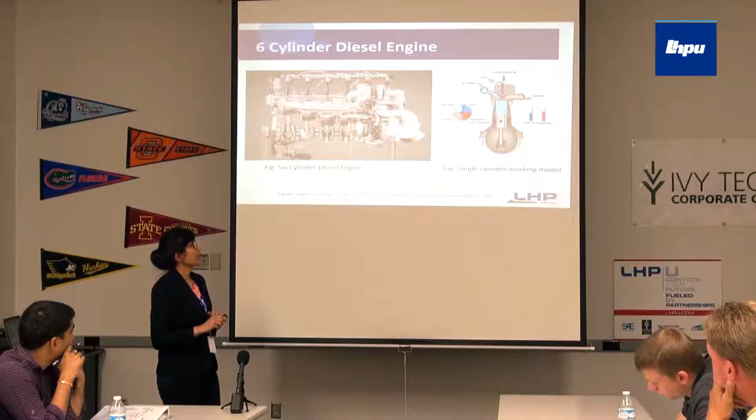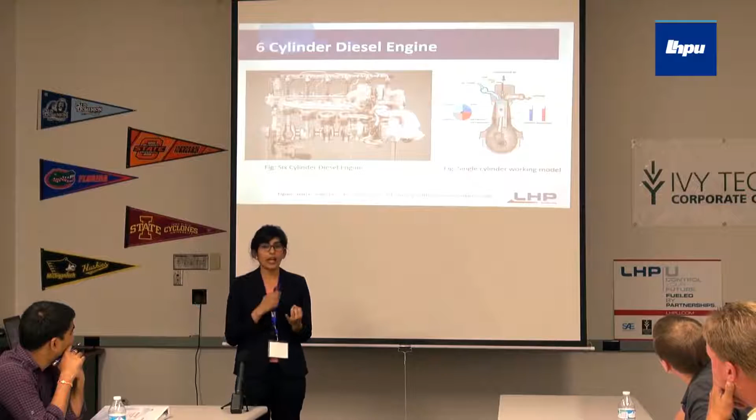As Ochiko said, running or controlling a diesel engine is our goal, that is what we had in mind when we came here. But initially we wanted to know how this diesel engine would work and what things we have to control. Here is a basic model of a 6-cylinder diesel engine, and on the right side is how a single cylinder works. I assume you all know this, but let me give a quick overview: we intake air, compress it, inject fuel at the right time, power is produced which runs the engine, and then there's exhaust. So the things we exactly have to control are when to give the fueling, that is the timing, and the amount of fueling we are supposed to give.

Here we know what we have to do, and here is how we are going to do it. A complete control system model has two parts: one is the plant model, and the other is the controller. From the plant model we sense data using sensors, our controller does all the mathematical calculations we want, and our actuator data is sent to the actuator, which puts the plant model into action. The data we're sensing is engine speed and pedal position from the plant, then we calculate the amount of fuel we have to give to the engine, and the actuator handles the lift pump and the timing of fuel injection, then we call back to the plant with that data so it can do its job.

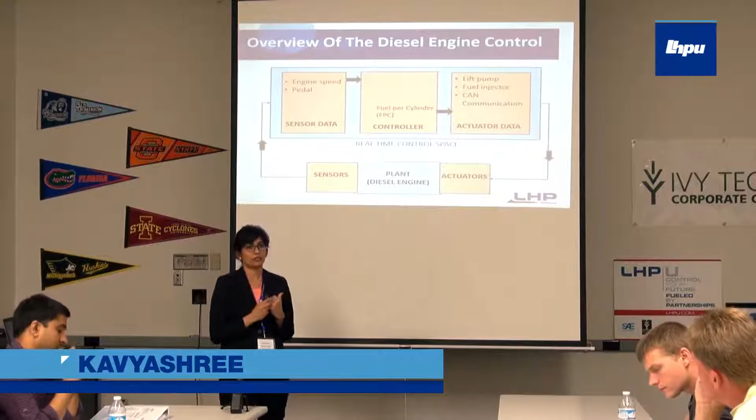But this is not exactly what we started on. We wanted to know how this would work, or have a smaller project that would tell us what we were going to do later. So for that, we designed an electronic throttle controller, which will be explained by Sandeep. Thank you everyone.

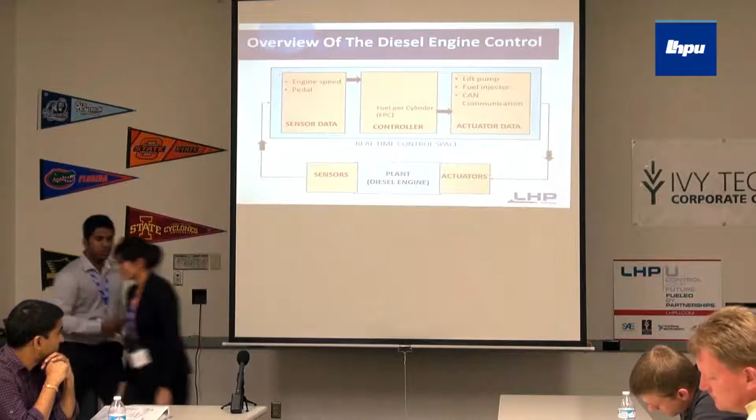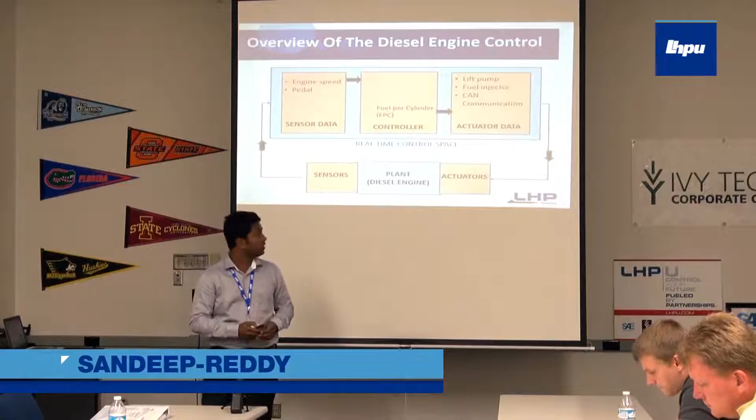Coming to its working, the electronic controller sends a reference signal to the analog slider and the throttle body sensor. When you slide this analog slider, which is connected to a sensor, it measures the position of the slider and alters the signal to the ECM.

The ECM collects the input data and activates the throttle body motor and the sensor of the throttle valve. The throttle valve, connected as a butterfly spindle valve, measures the angle and gives feedback to the controller. The main function of the controller is to take inputs from the analog slider and the throttle body and make sure these two functions accordingly.

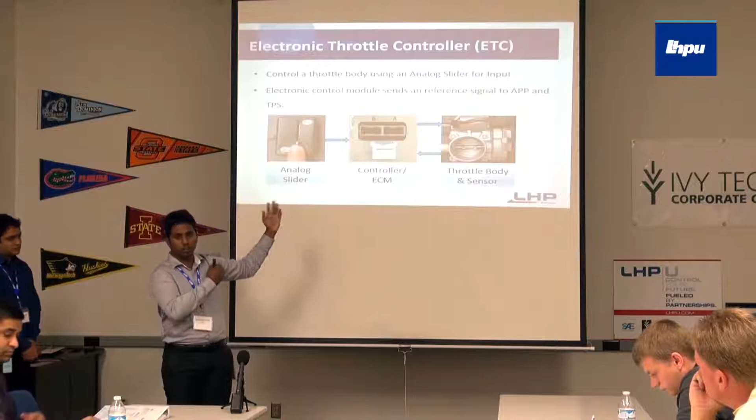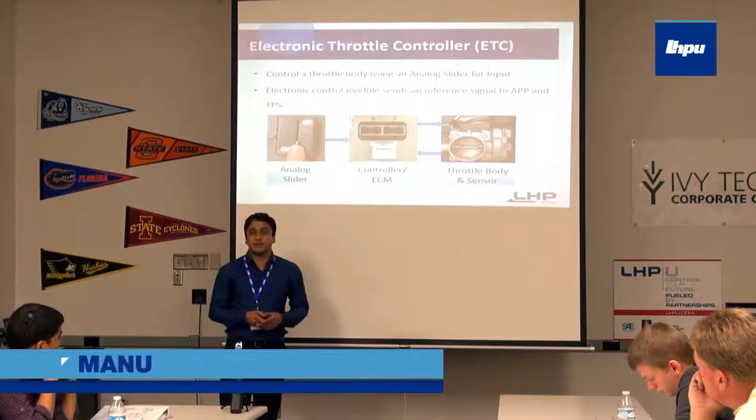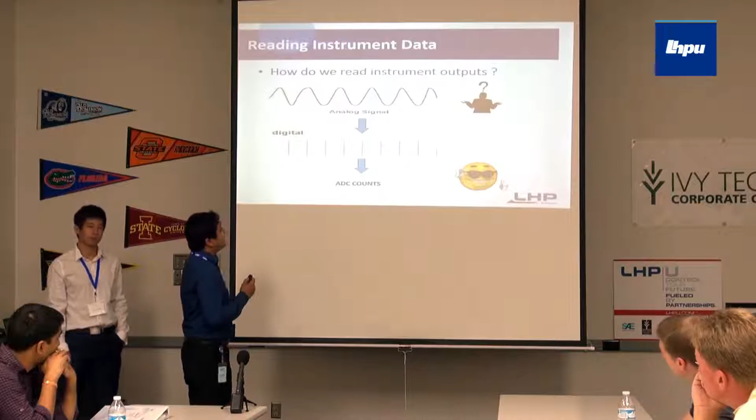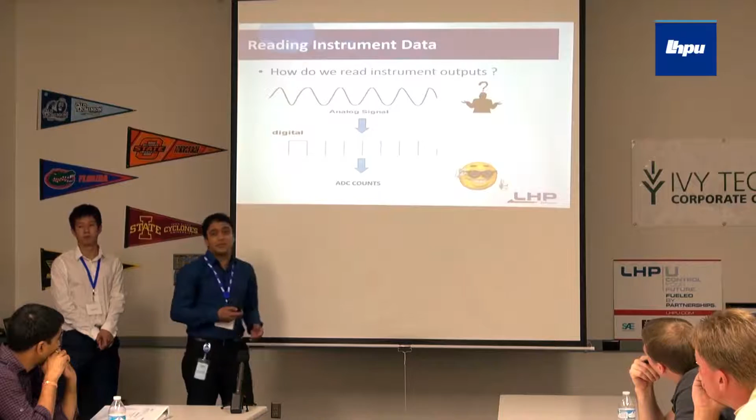What we see here is we need to read some data off of these instruments, and it turns out they operate on analog signals. These wiggles don't necessarily have to mean much, so modern electronics has a way to convert them to digital samples, and thanks to MotoHawk, we can read them in easy ADC counts, mathematical quantities we can work with and convert into engineering units.

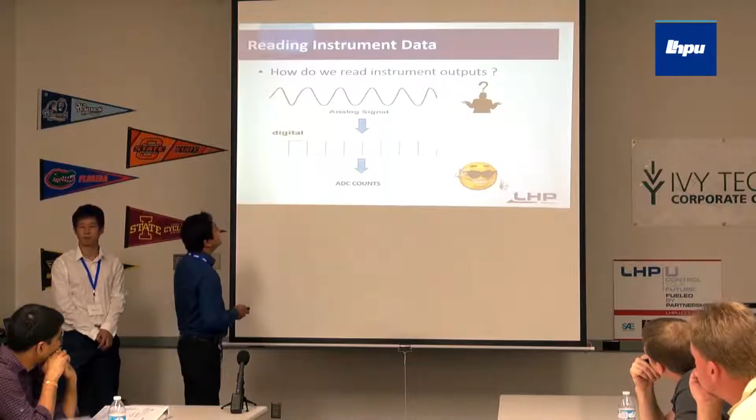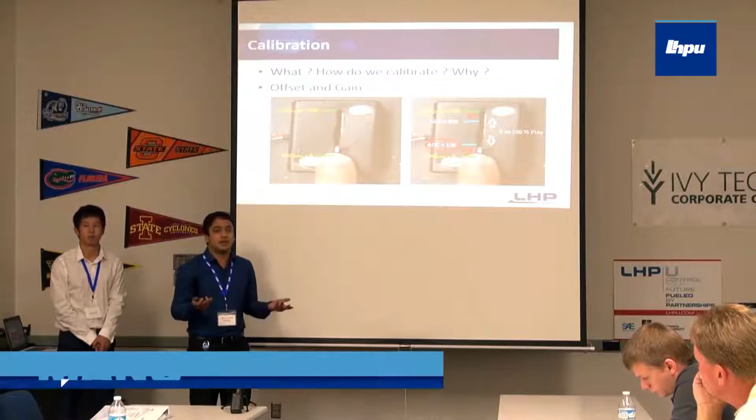We make corrections to our readings, and we make corrections to the inputs that we have. Calibration is really important. This is just a simple case where we are retuning our operational ranges, but sometimes they're far more consequential.

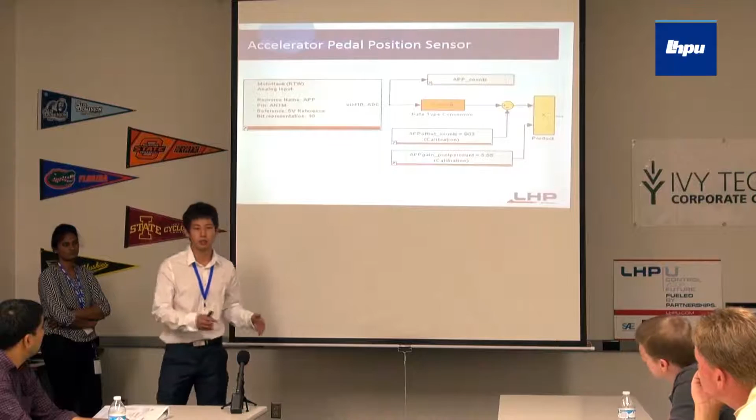I'll introduce how we build the connection between the real sensor and our MotoHawk model. We use this analog model to get the count, and we convert the counts, using gain and offsets, to a scale of 100%. It's better and more convenient for us to further calculate.

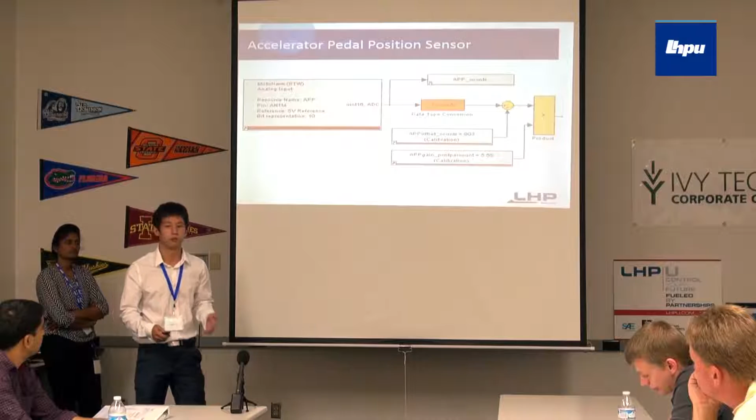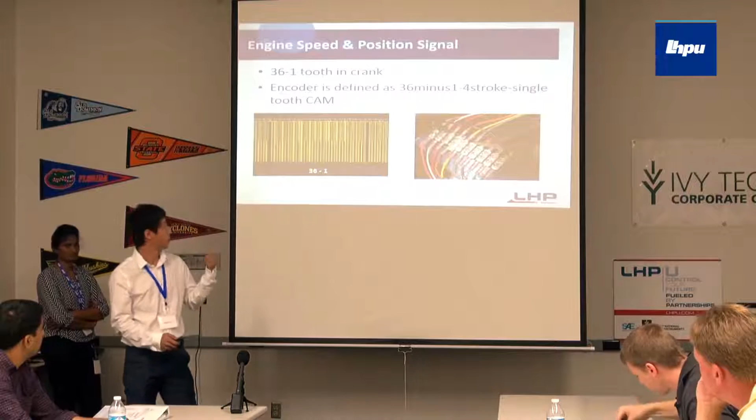And here we go, the RPM sensor. Before definition, we need to figure out how it works, how the encoder pattern works. So we go to the engine room, put the probes to the engine signal, and we get the photo.

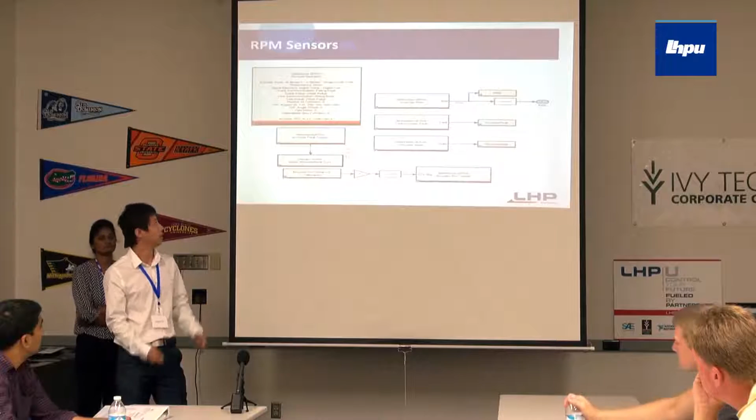We see when there are 35 single pulses, there's a gap - that's to say, there's a 36 minus 1 teeth in the crank. So we know there's an angle in the intervals, and divided by the duration, we can figure out exactly how many rotations per minute. That's where we define it here in this model: the 36 minus 1, the single tooth, and the rising edge - bingo, we got it up here.

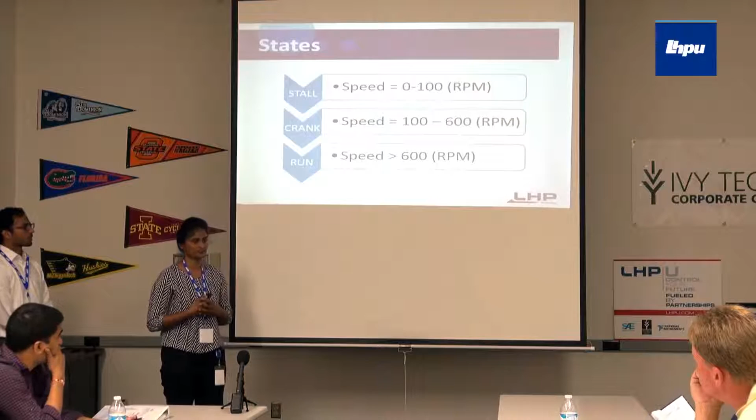In a similar way, when we fuel our engine, it gradually starts giving fuel and gradually speeds up. The initial stage is stall, where the speed is set to be 0 to 100, and the next stage is crank, where the speed is set to be 100 to 600, and the next stage is run. This is the stage where we control the fuel with the speed and the pedal governor.

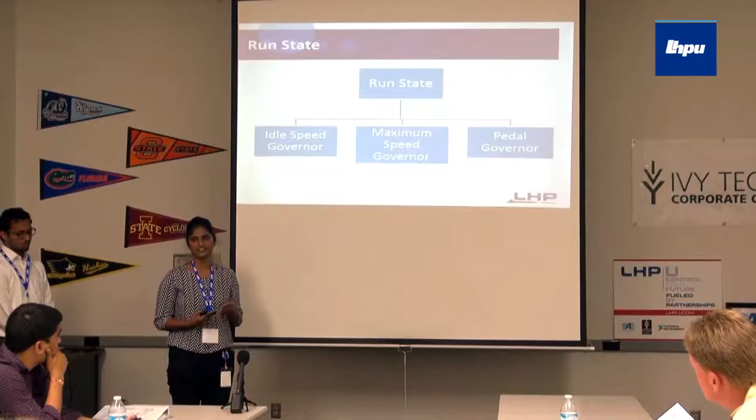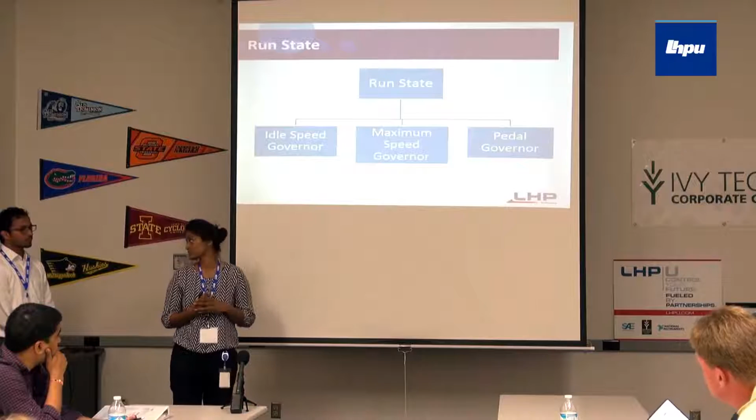If I keep on saying this presentation, you guys get bored and don't even understand what I'm going to say. In a similar way, if we keep fueling our engine, it goes on speeding up, and we don't want to blow up our engine again. So now we're limiting the speeds using max governor, idle governor, and pedal governor, and this is being explained by Suyog. Thank you, Kirti.

Hi, my name is Suyog. I am a graduate student in electrical and computer engineering at Purdue School of Engineering at Indianapolis. I am going to talk about the controller part. As explained by Kirti, there are three governors: idle speed governor, high speed governor, and pedal governor.

So how does a controller decide which governor to be activated? If your RPM is below 1900 and you are not giving any throttle input, which can also be below 2%, then your idle speed governor will be activated. Otherwise, it will go on to the high speed governor.

For the idle speed governor, we have set a limit of 700 for idle speed, and we are targeting our speed to 700, with the throttle percentage less than 2%, and we are achieving a smooth curve while accelerating and decelerating.

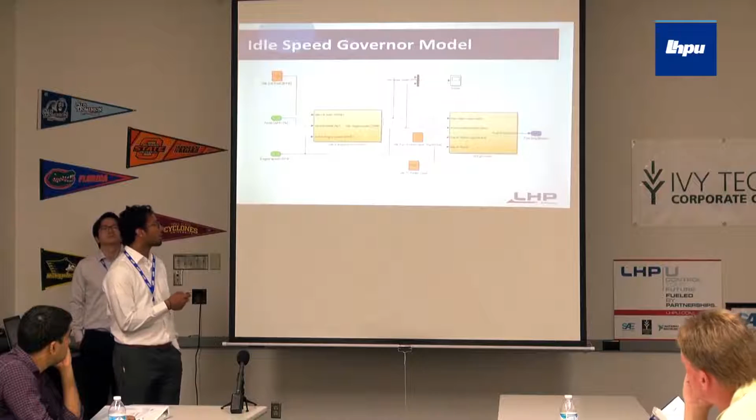Here's our Simulink model. You can see the idle management controller. Here are some logic and mathematical equations in it. This is a PI controller which just increments or decrements according to the orders from the idle management controller. It acts as a brain, and this acts as a body part.

The pedal governor is just relating APP with the fuel. If we are not using the high speed governor or the idle speed governor, the pedal governor will be activated.

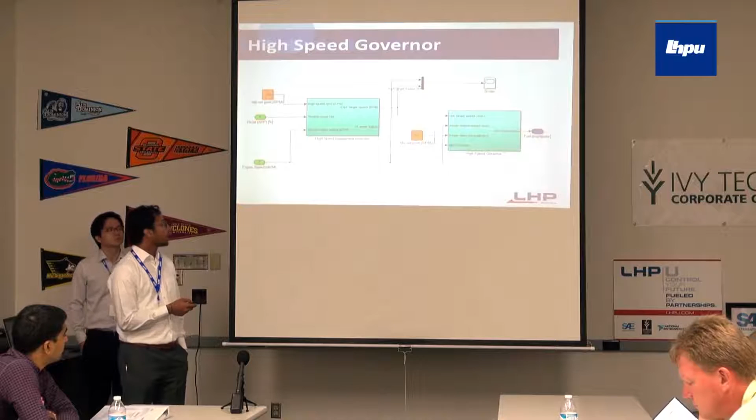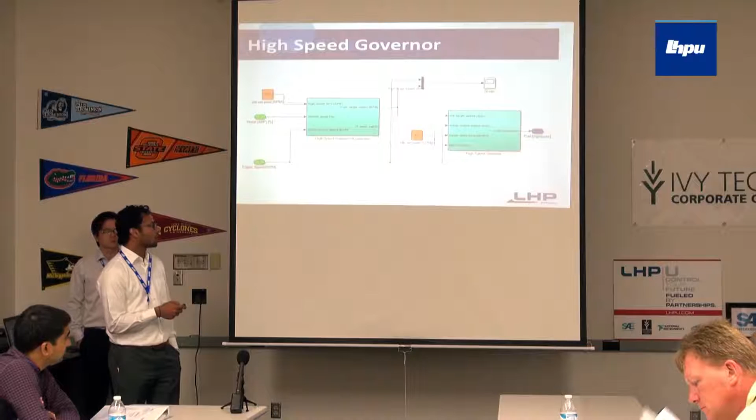This is the high speed governor, which is identical to the idle speed governor, but the mathematical calculations and logics here are different. In this case, the RPM should be greater than 1600, and your APP should be greater than 2%. We have PI control to increase or decrease the speed and set it to 1700 RPM.

Thank you. My name is Yinchuan, and I graduated from University of Illinois at Chicago with my master's degree in electrical computer engineering. I'm going to talk about the PI controller.

What's a PI controller? It's a control loop feedback mechanism trying to decrease the difference between the target speed and actual speed by adjusting the fuel injection. What does that mean? Basically, it's like you're chasing girls, and according to the girl's reaction, you adjust your next move.

So how does it work? The PI controller continually calculates the error value. The error value is multiplied by the P gain to generate the P part, and the error goes through an integral transfer function to generate the I part. By adding them together, you will know how much fuel you need.

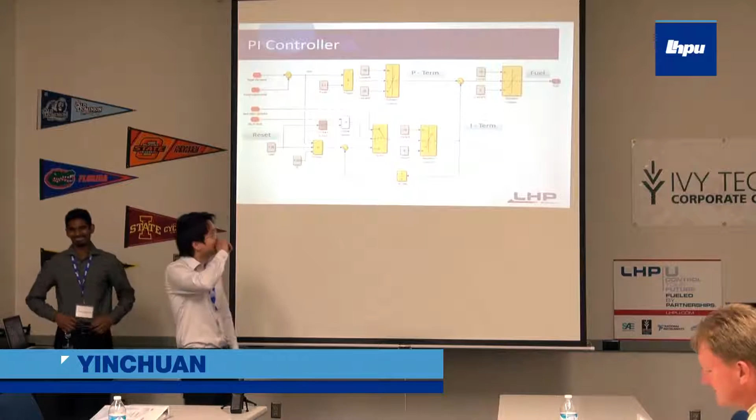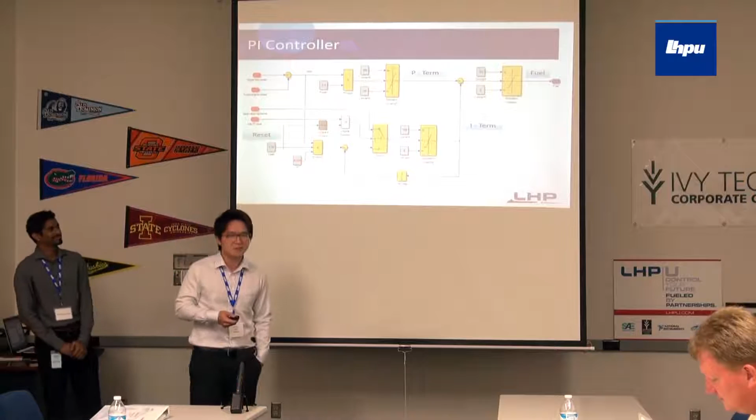But how to transfer this fuel from the tank to the engine, I'll let my teammate Shanmuga explain this for you. Thank you, Michael.

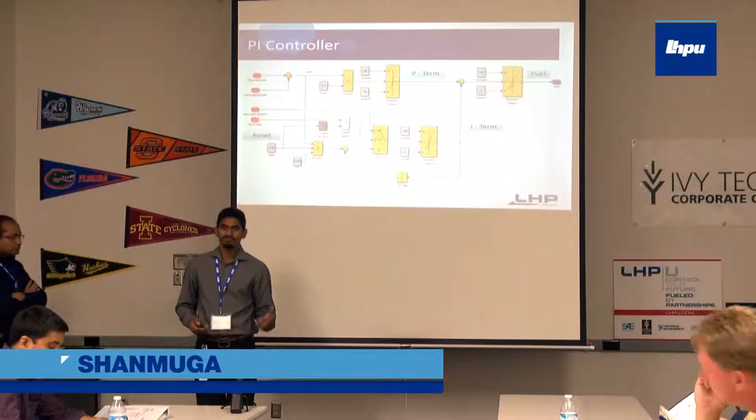Up to now, we have seen the specifications of the engine we are working on, the sensors, and the controller output, which is the fuel, the calculated amount of fuel which is going to be given to the actuators.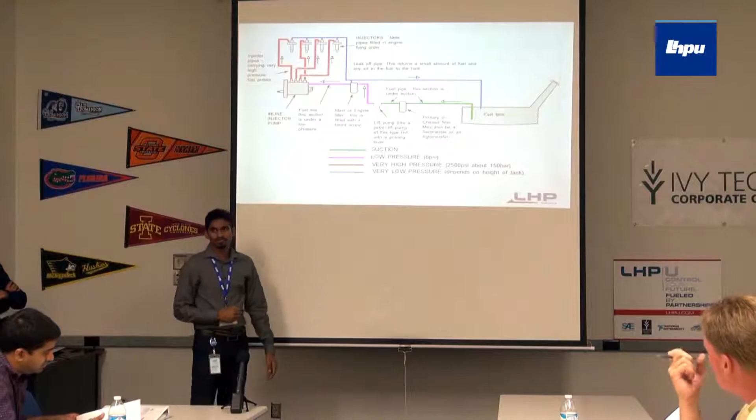And this is our lift pump. I have to say something about this - this is the guy who created a lot of trouble for us and faced a lot of trouble from our faulty models. And this is the overview of the fuel management system.

In motorcycles, we have the fuel tank on top of the engine, where we can use gravity to take the fuel from the tank into the engine. But in case of cars and trucks, it's not going to happen - we cannot use gravity anymore. So we need something else.

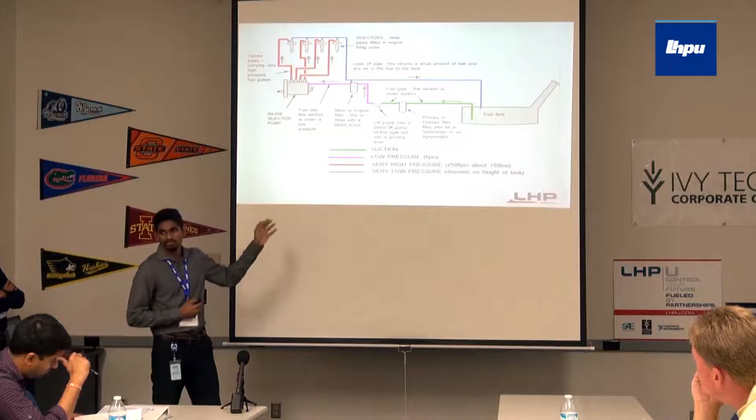Here comes the lift pump into action, where it takes the fuel from the fuel tank and passes it through the chassis filter and gives it to the VP44. But it also does a main function in keeping the low pressure among the system up to the VP44.

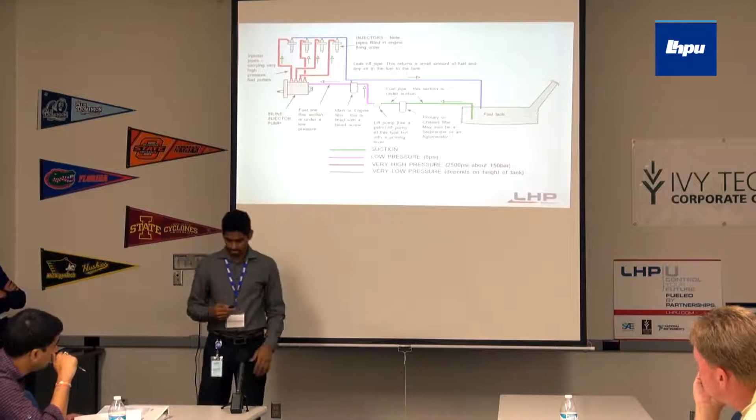And this is our governor model, where we have initially found out the states where the engine is running, whether it is in stall state, crank, or run.

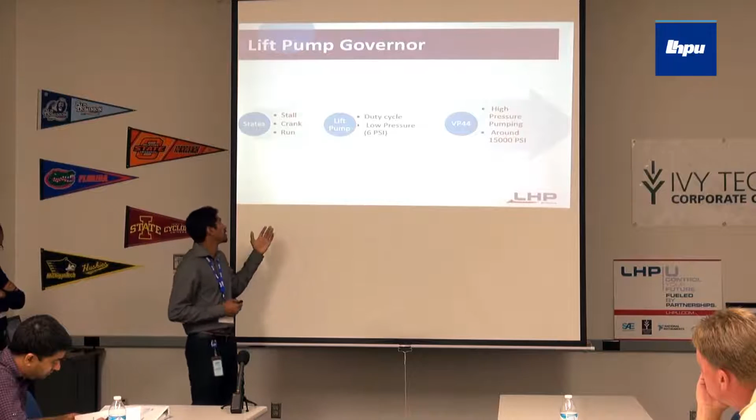If it is in stall state, we have given the duty cycle as 100% for the first 2 seconds, just to prime the pump, to bleed the air bubbles outside and send clean fuel.

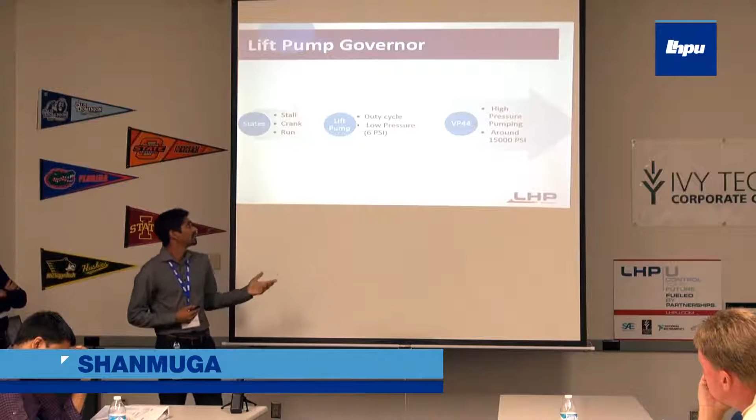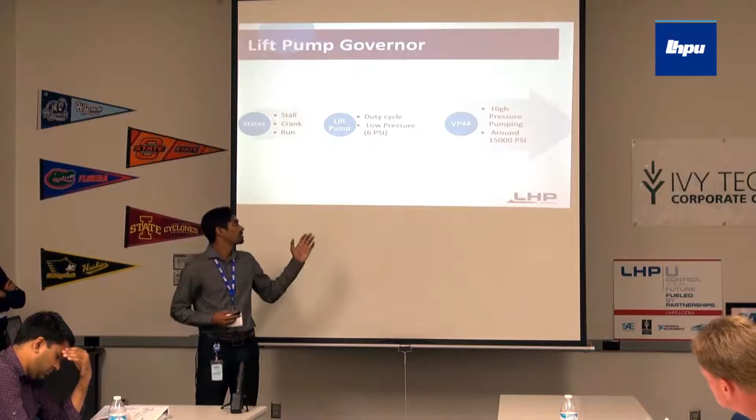And for the crank state, we give 50% duty cycle, and for run we maintain 100% duty cycle, and we maintain the low pressure at 6 psi. And the rest of the things will be managed by the VP44 to pump the fuel with high pressure.

And that will be clearly explained by my teammate Tanvir.

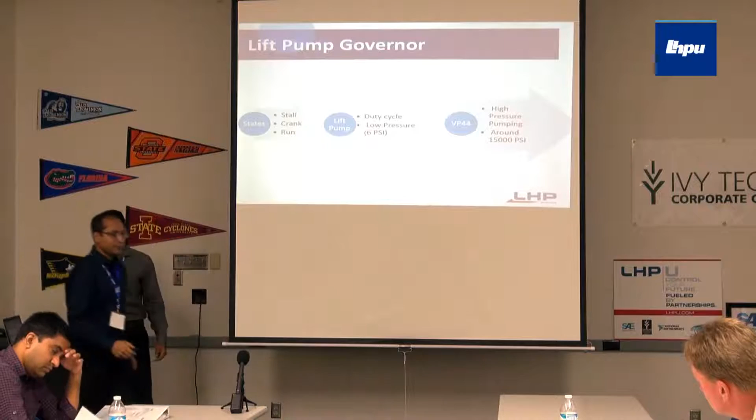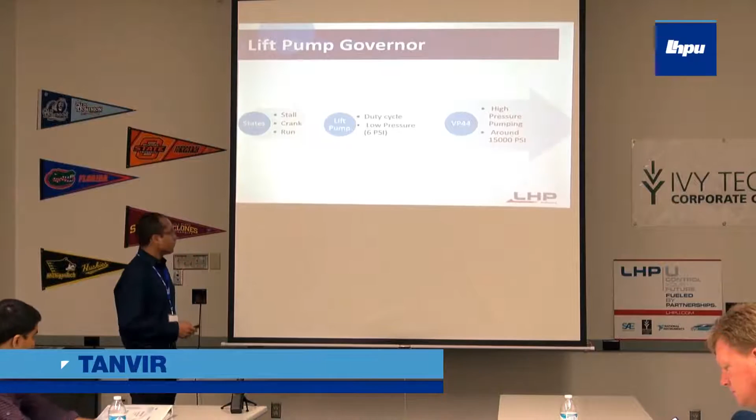And now I'm going to explain the VP44 and what it is. Shanmuga just explained the lift pump, that is a low pressure pump that just supplies fuel from the fuel tank to the fuel system. But the pressure is not enough so that we can spray it inside the cylinder.

So we need another high pressure pump, the VP44, so that we can attain that high pressure and distribute the fuel inside the cylinder according to the proper firing order. So you can see it's the VP44 from Bosch.

There are 6 cylinders, so we have 6 outlets, and that distributes the fuel inside the cylinder. So what it does, basically, as I described, it pressurizes the fuel, it distributes the fuel according to the firing order, and also it meters the fuel that we send by pulse.

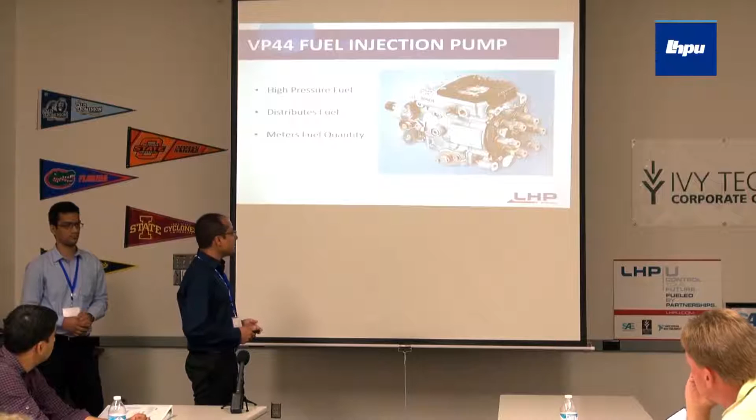And this is what it looks like. The position of the pump in the engine is on the left side if you look from the flywheel side, and it is driven by the camshaft. You can see the driving shaft that is located just behind the timing gear assembly. It is driven by the camshaft, and it is a radial piston pump.

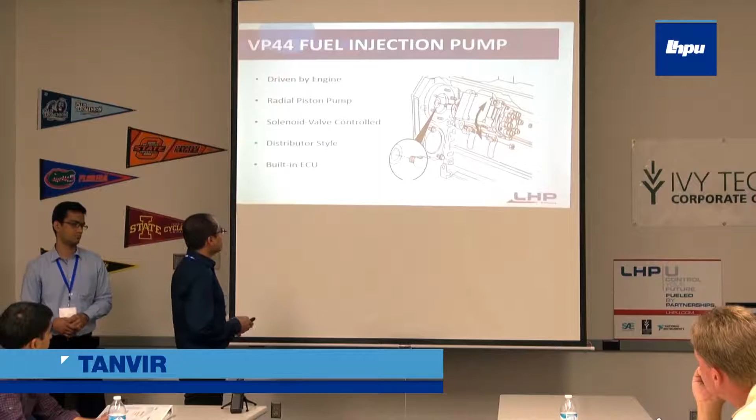It has solenoid valves at each outlet that we control the outlet of the fuel, and it's a distributor style. And almost in all the pumps, there are built-in ECUs that communicate with the main ECU of the engine using CAN communications.

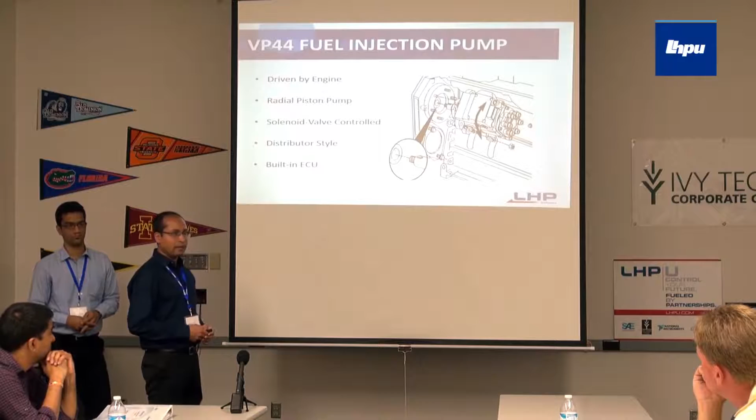That is the overview of the VP44, and the rest of the pump, how it is controlled and what we did, will be explained by Ajay. Thank you very much for your attention.

Thank you, Tanvir. Hi, my name is Ajay, and I'm from Arizona State University. I have a master's degree in mechanical engineering.

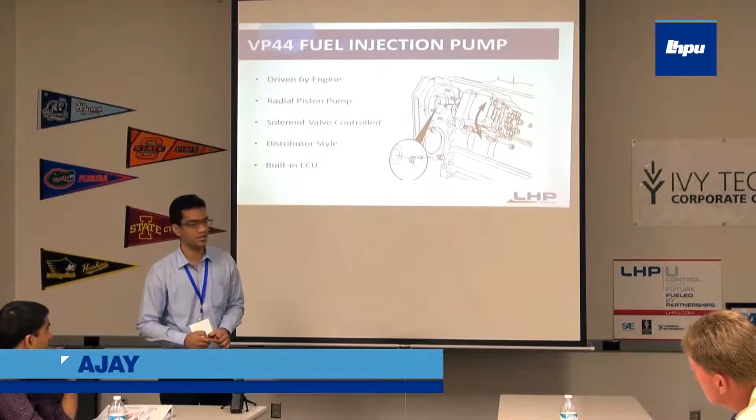Now going back to the governor. From the governor, we learned how much fuel we need for control to happen. But the question arises, when do we supply this fuel between the cylinders? How do we inject and how do we time? This gives us a cue to the VP44.

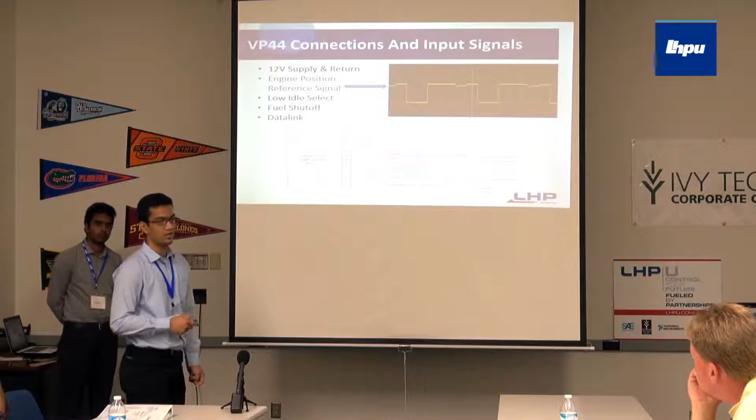And how do we do it using the Motohawk blocks? We have something called the Motohawk Dual PSP. We use this for injection and timing.

There is another challenge. There are going to be only 3 pins on our ECM board that can be used to fire our engine, but we have 6 cylinders on the engine. So what the Dual PSP does is it creates two

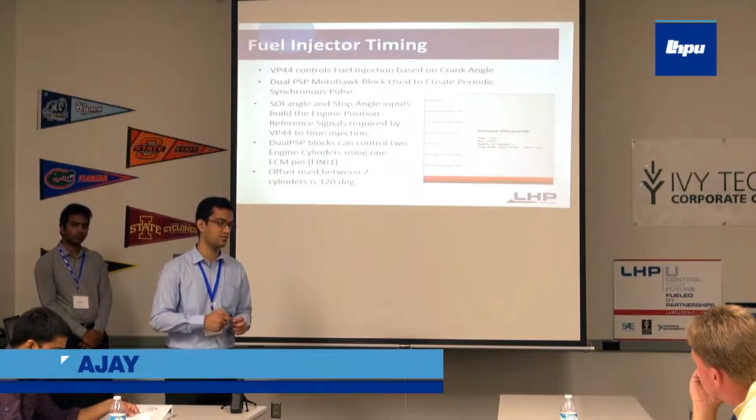pulses which can be offset by 120 degrees, and this helps us time the engine. So we give our engine offsets of 120 degrees. We give the start of injection and the injection duration, and this helps us time.

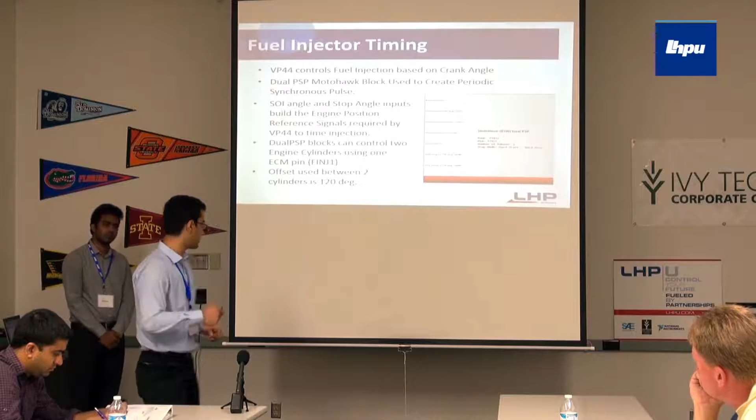Now, how do we let the VP44 know how much fuel we need to get? I'm going to ask Siddhartha to explain about CAN communication.

Thank you. Thanks, Ajay. Now we have looked at the sensors, controllers, and actuators. So we need some communication to send the control commands from the controller to the VP44 pump. So we have used the controller area network, which allows the microcontroller to talk with the devices in a network.

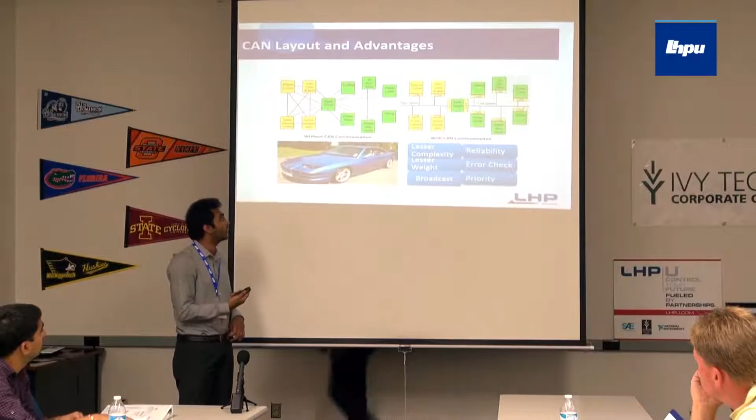We have very few devices. Point-to-point wiring is a cost-effective method, but if you have more electronic devices in a system, the system becomes very complex. So CAN is used to overcome this complexity with additional benefits.

So we have an error checking mechanism which we can implement in the CAN. We can assign priorities to our messages. We can send broadcast communication to all the nodes, and the complexity also reduces. And the BMW 8 Series is the first car in which the CAN protocol was implemented.

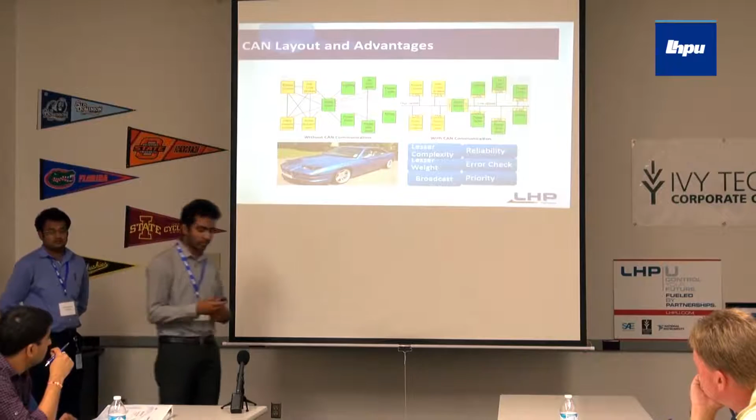And this is the diagram which shows how the CAN bus looks. We have nodes which are connected in parallel, and the CAN bus signal is represented by the difference between the CAN high and CAN low signal.

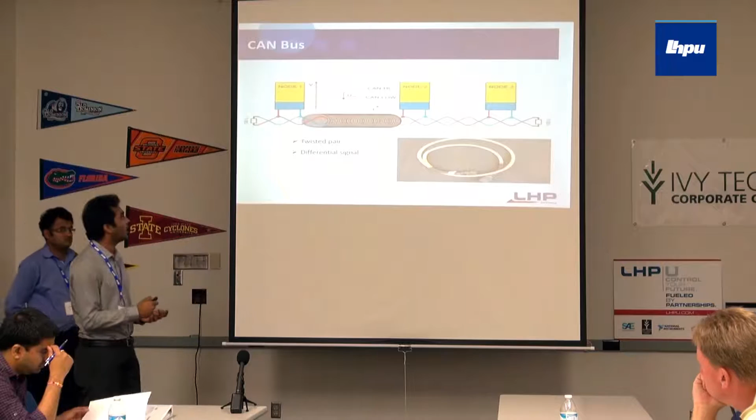So if we have any interferences coming from external disturbances, it affects both signals, so the effective difference still remains the same. That is why we use differential signaling for this communication, and we can also use shielding to avoid external disturbances. This is the cable which we use for our electronic throttle control project, which has proper shielding.

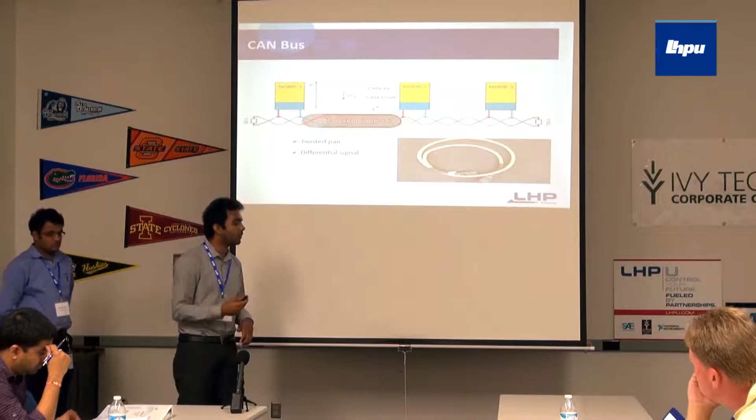Moving on to J1939, it is a specification which tells how we need to implement our CAN protocol. We can assume that CAN is a telephone wire network, where J1939 is a language spoken on the telephone networks. It allows a maximum of 30 nodes, with 40 meters as the maximum length, and it works at 250 kbps.

Now we'll see how we actually send our CAN messages, which will be explained by Shashi. Thank you.

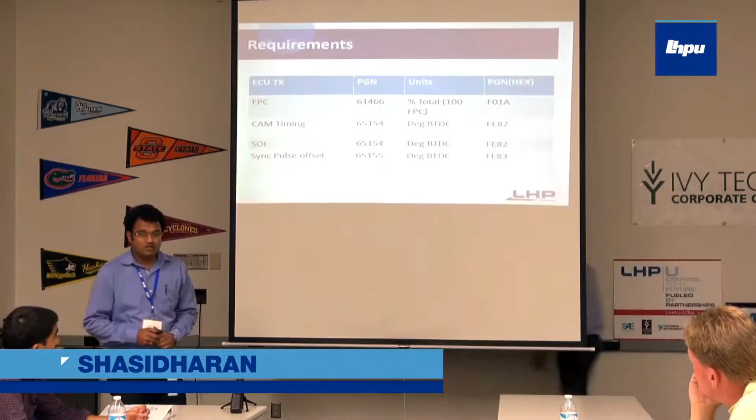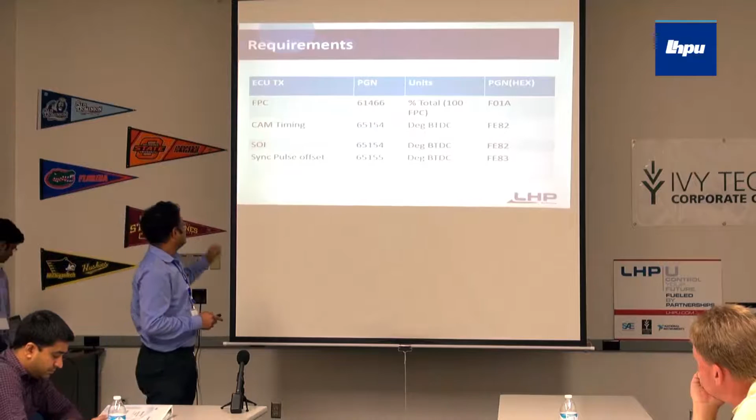Today I'm here to talk about CAN messages. In this presentation, we'll see what and how to send in a CAN bus. We will be sending information about fuel, some information about CAM timing, some information about ignition, and some information about synchronization.

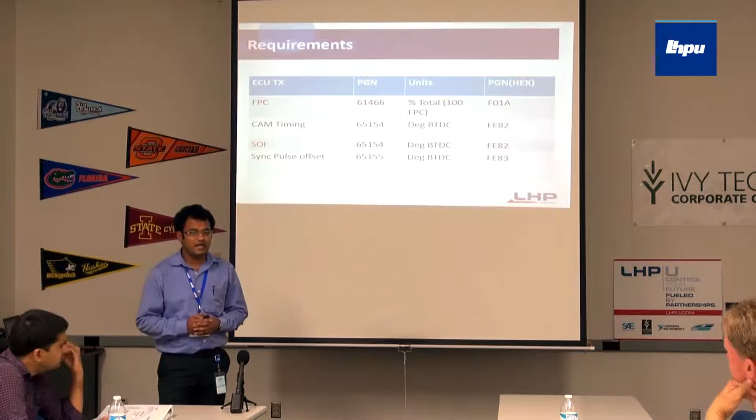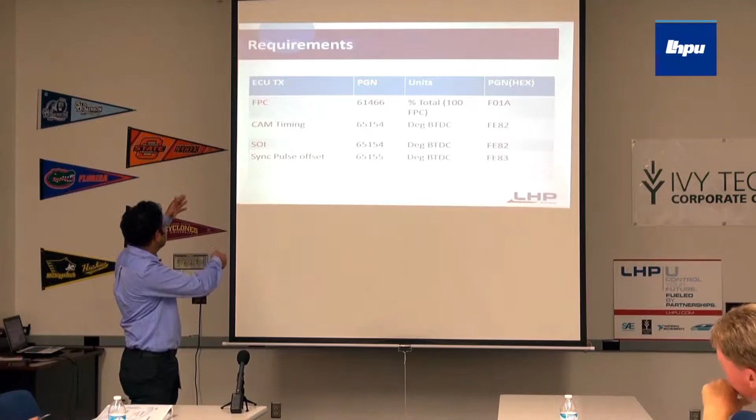To make it simpler, just for understanding purpose, in the real world we have different languages, and each language is differentiated from the other by using a set of rules. Similarly, we need to differentiate the information of fuel from the CAM timing, and we do it by using PGNs with the help of SAE standard J1939.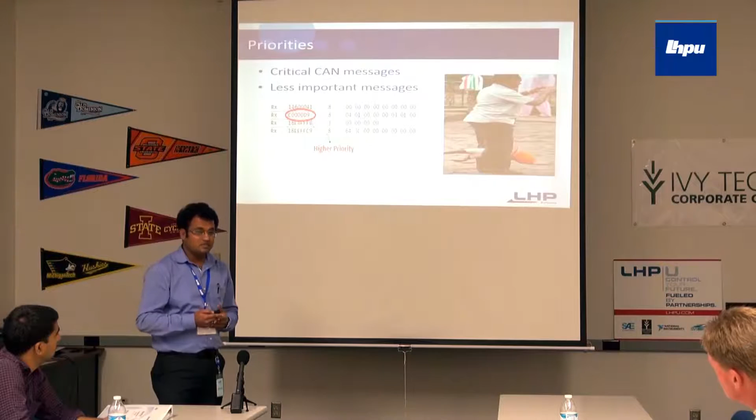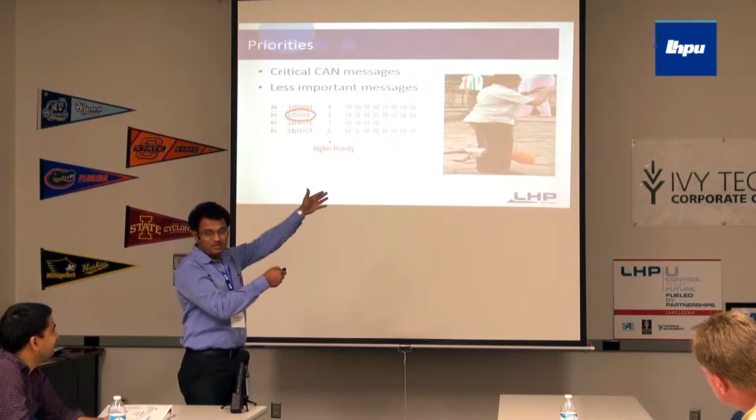In this picture, you will see that the person gives more importance to the camera than his child, which clearly shows he doesn't have any priorities. So we need to give priorities, and SAE J1939 helps us to give priorities. This is how a prioritized message looks compared to less important messages.

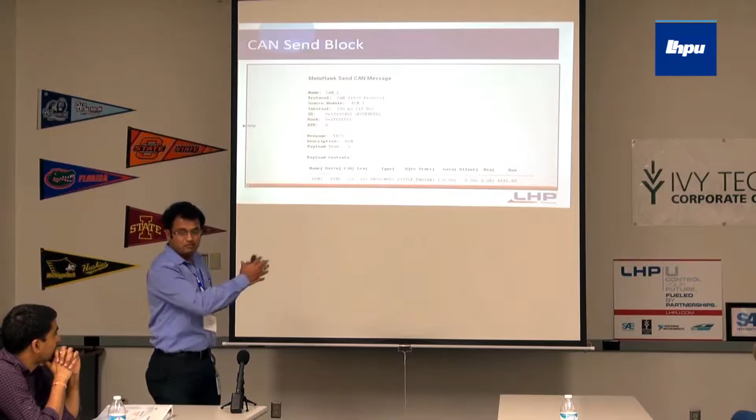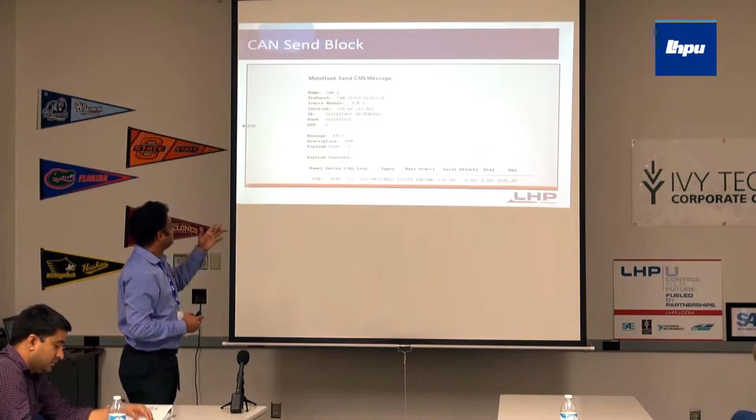So this is the MotoHawk CAN send block. We'll be giving information about start bit, value, offset, and bit length by using MATLAB script. And we should note that J1939 uses Little Endian format.

By this time, we assumed we had collected the necessary information to build up a model. So we went ahead and built our model, and just like a real world scenario, the model should be tested before it goes into production. My friend Samant will be talking about the testing procedures.

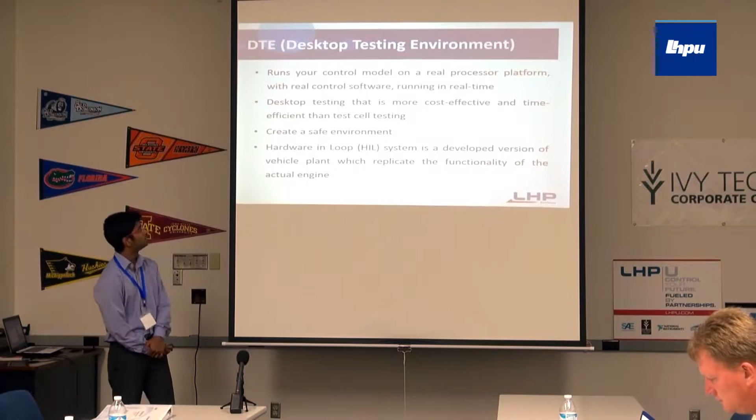Once we were done with DTE, I want to conclude this presentation. Before coming to this LHP, we were confused about what we were going to learn. We just had clarity that we were going to run a diesel engine, but we didn't know exactly how we were going to do that.

There were several series of steps given by LHP, and several requirements and design things given by LHP, and they were very on target, so we were able to understand each and everything properly. Because we had different teams at different times, we were able to build a team and act as a team at every point in time.

The first thing we did was requirement analysis, trying to design how the model should look. Then another important thing we did was documentation and issue tracking. Whenever we built a model, as I mentioned, we changed teams at each point in time, so we were not able to discuss the previous team's model with the other team directly. This documentation and issue tracking helped us with that.

So even though we were in the middle of building our model, we were building it from scratch at each point in time, and this helped us a lot. After building it, we did integration testing, and we had regular team meetings and lunches, which helped us become more of a team. So we became a team by the end of the course.